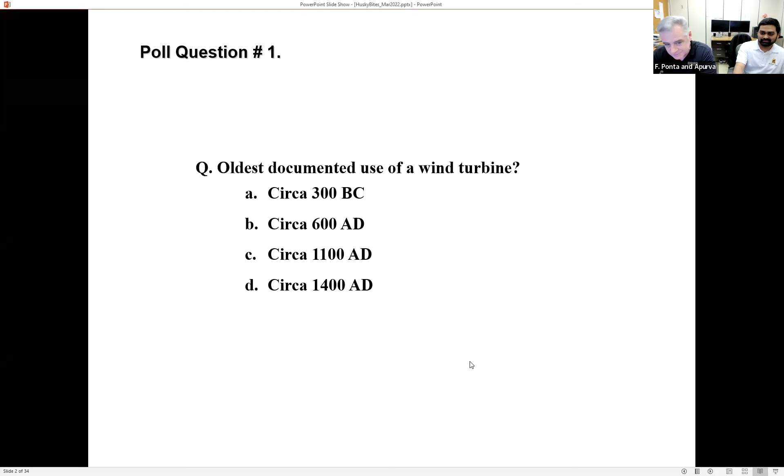As I said before, they are so useful that some of them are still in use today, very sturdy, very easy to make, build, and maintain. They are maybe the utmost example of the so-called drag-driven or drag-based machines. What do we mean by that? The primary forces that push those blades, if you want to call them, actually they are wooden planks, in order to produce power on the main shaft,

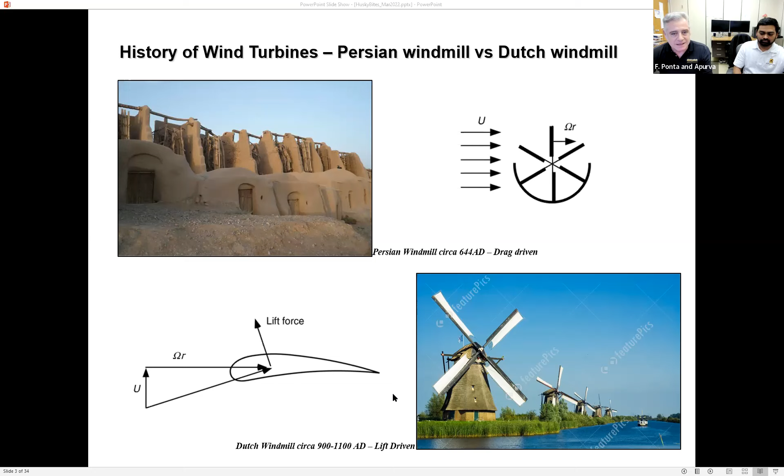Before going into that analogy, which we'll do in a couple of minutes, one thing I would like to emphasize is that this evolution over these 5 or 6 centuries was fundamental in the evolution of wind power as we know it today, because the basic physical principles of the Dutch windmill of the late Middle Ages are essentially the same physical principles on which current high-tech wind turbines operate today. They are more sophisticated and refined, but physically they are exactly the same type of horizontal axis wind turbines.

But before we go into this analogy with the evolution of sailing rigs, let's go into another poll question. Which do you think is the largest application of wind energy in terms of total accumulated terajoules along history? First option, water pumping. Second option, flour milling. Third option, sailing. And fourth, electricity generation. Again, a lot of competition. Look at that.

That's a good one. You'd have to make a lot of assumptions about all these things. Pay attention to what we said here: total accumulated terajoules. We are talking about the amount of energy, not the individual application, not how many turbines you have here and there. I'm going to go with sailing as well.

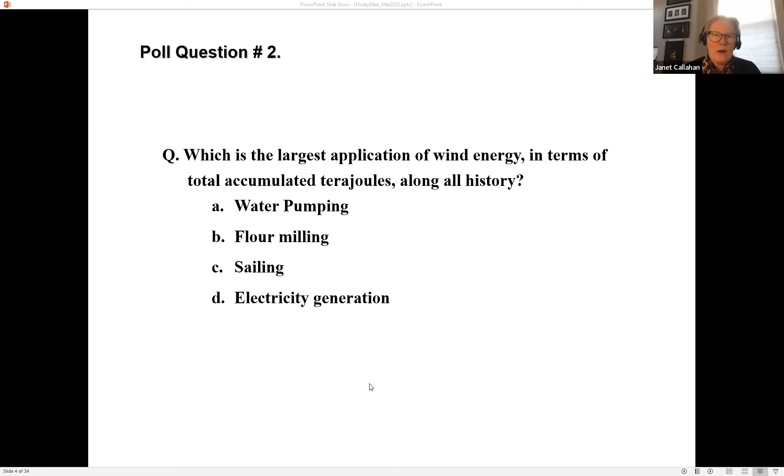I think we've got two popular answers here, water pumping and sailing. Yeah, you are the winner. Sailing is by far, and then I'm going to leave Apurva to explain this.

So all those who chose sailing, if we consider, there's no way we can quantify the amount of energy that was used by sailors since the beginning when they started sailing, when they explored around the world. But considering all of that, the use of wind power for transportation through vessels, by far, even though we might not have concrete numbers, eclipses any other use of wind power that mankind must have involved itself in. A long history. Yeah. So yeah.

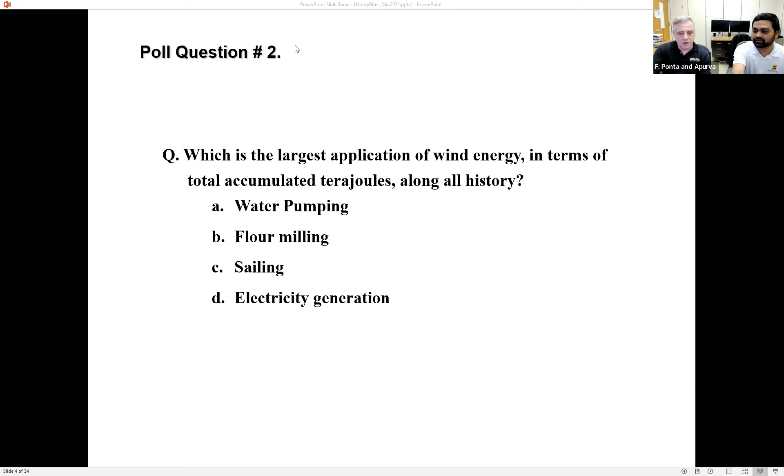So when we talk about the evolution of sailboat rigs, we need to understand a little bit about the points of sailing, as in how a sailboat moves with wind. For simplicity purposes right now, we're going to talk about three primary points of sail. The first one is very simple, the wind coming from our back, which is we are sailing downwind, and the drag forces in the downwind are the most dominant force. And that's why we can sail with the wind.

The next point of sailing is when the wind is from the side, whether it is hitting us exactly on the beam of the boat or at an angle, but primarily from behind. In such a situation, we do have a lot of lift as well as drag, but it is primarily more lift.

The third point of sailing is when we are heading much more towards the wind. We can never sail exactly into the wind, but we are still sailing upwind. In this point of sailing, the forces acting on the sail are primarily dominated by lift. And it is the lift forces which allow us to sail close to the wind, which is what allows us to sail upwind.

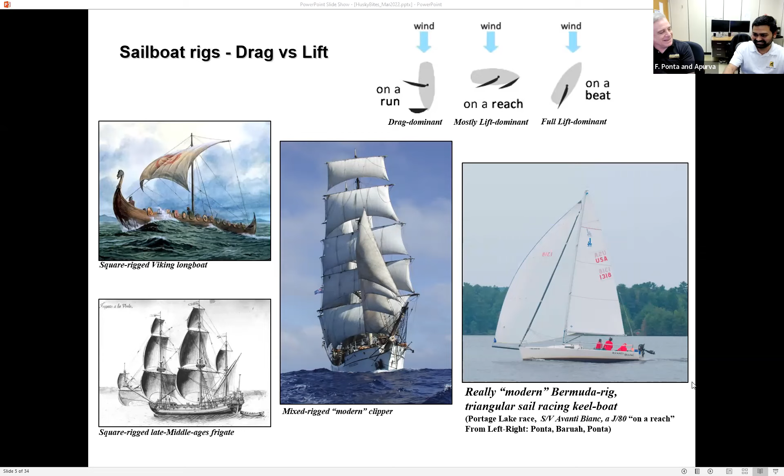So, when we say that this inherent efficiency of the lift generation process, versus the generation of drag and all these associated frictional losses, is essentially the physical underpinning of the fundamental progress in wind power. In modern times, we can trace a similar evolution in that refinement that moves us from the Dutch windmill into the high-tech, propeller-like wind turbine of today, which is the incorporation of a lot of optimization in aerodynamic surfaces and airfoil designs, etc. Material sciences too, but mostly aerodynamics that are used in aeronautics.

So without entering too much into details, because obviously we have these time limitations, here we can see a schematic view of this classical, 3-bladed propeller type wind turbine of any size, and we can see how we can decompose the typical blade into segments. Later, we're going to return a bit to this notion of the blade segments. Each segment is some sort of slice that you can cut, and it's going to have some sort of airfoil profile, because it may vary along the blade in different shapes, which are more suitable to operate in regions closer to the hub or closer to the tip, etc.

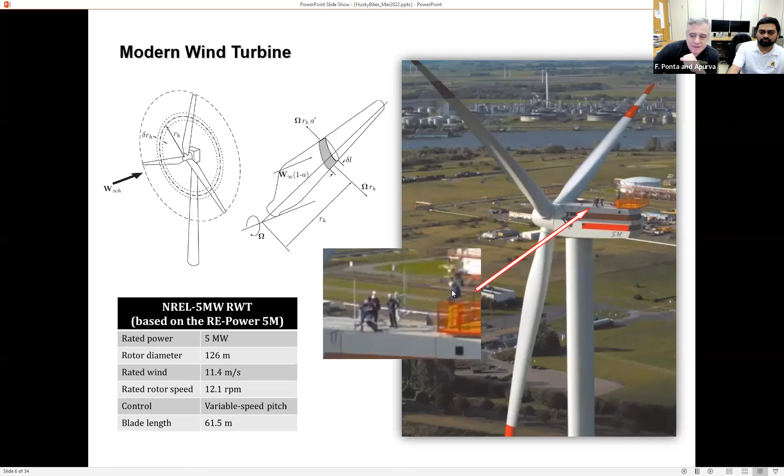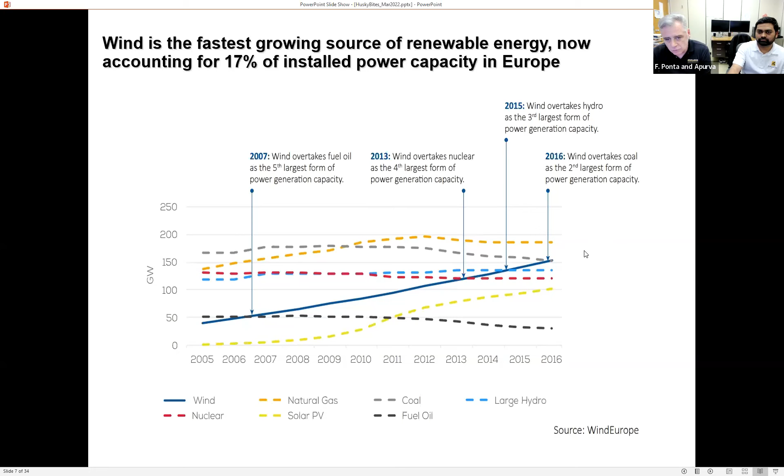We're talking about the big economic group, which together with China and the United States is one of the biggest in the world. Now in 2022, probably, wind is already by far the most important source of installed capacity in Europe. And this is not just a question of history, it's what we can expect in the future.

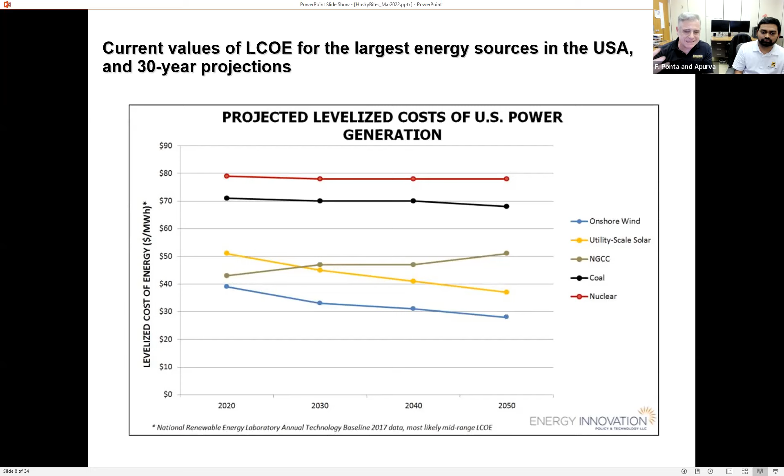And it's not only today, it's the projections for the future: that economic advantage is likely to increase systematically for the next 30 years, while the rest of the sources are likely to remain constant, especially nuclear and coal, and natural gas actually is likely to go a bit up, because, well, obviously the depletion of gas reserves. So this evolution is not only just the technology, it's also the increase in the size of the typical machine, essentially the state of the art wind turbine of today.

That leads to our third question, which is, in your opinion, the approximate diameter of the largest operational, not planned, operational wind turbine prototype of today? So can we have the poll? Could we have the poll, please?

It's good people had a chance to think about that. And I'm trying to convert to like feet in my head and to the size of a stadium. Yeah. I'm just gonna guess bigger here. Yeah. 220.

This could have been a tricky question that we put there, because there are two key words there. One is operational and the other prototype. And the choices range from 80 meters to 220 meters. Yes, exactly. So later, Apurva is going to talk a bit more about how to translate that into more practical distances. The actual answer is 220.

Why? Because we talk about the largest operational prototype, a prototype that is running and tested. Most of the people answered 160, which is not so wrong when you talk about the largest operational commercial turbine of today. Because if we talk about size, actually between 120 and 160 they form the core of the turbines that are installed today commercially. But the state of the art, the cutting edge in terms of size of turbines, is 220. And there is a reason for this continuous scaling, if you can go to the next transparency.

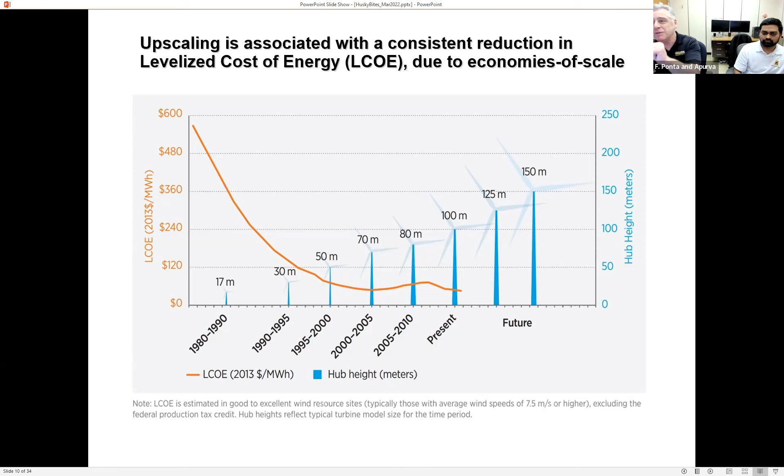But the upscaling is a fundamental factor. When is it going to end? We don't know. Actually, we can have some speculations. We can discuss later if people are interested in the question section. Where are we at today?

So anyone who got 220 meters, rejoice, you were correct. 220 meters is the largest currently installed diameter of a turbine. This is the GE machine. They're currently testing it in Rotterdam, in the Netherlands. This is a machine that is also going to be installed in a project closer to home in the United States. It's just off the coast of Massachusetts.

People have heard of Martha's Vineyard. That is where they're going to install this, and that is an offshore wind farm as well. Now, to put things in perspective, the turbine blades of this are 107 meters long, and that is just a little less than an American football field, end to end. That is how long one blade is. Another way to think of this is it would take Usain Bolt, the fastest human on Earth, 10 seconds to run from one end to the other.

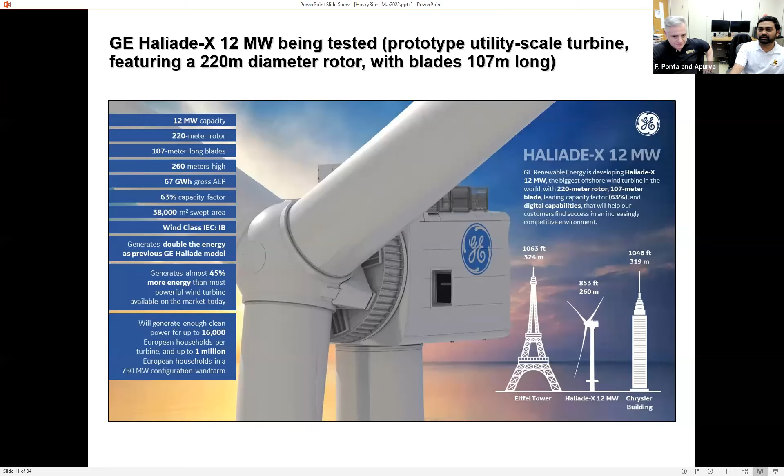Yeah. So that has been one of the big focuses in the area, to improve and make individual turbines better through all these years. But moving forward, we need to think beyond just the scope of one turbine as well. And the real thing here is that even though you can invest time, effort and resources, which is very valuable, in improving the performance of the individual turbine in many aspects, technological, economical, resilience, you name it, wind turbines don't operate alone.

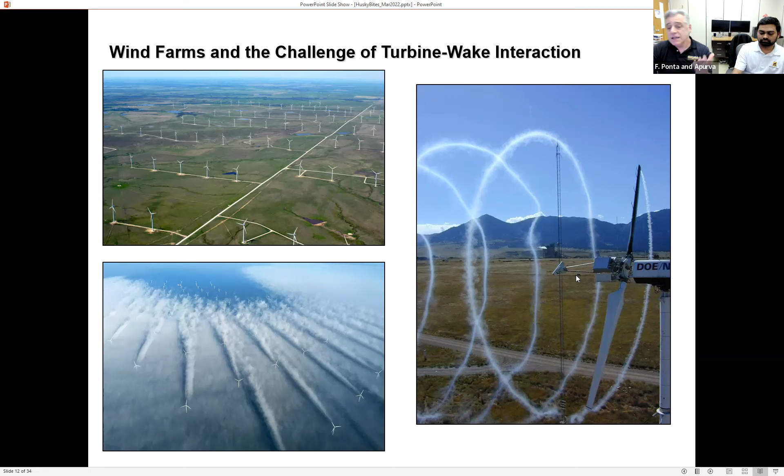Well, this is not just a theoretical curiosity. In terms of aeronautics, for example, the action of these tip vortices is likely to produce substantial changes in the aerodynamic efficiency of the wings, to the point that, if you look at modern airliners, even new versions of old airplanes like the Airbus 320, etc.

Now they have these winglets added in order to mitigate the influence of those tip vortices. Those winglets, simple pieces of plastic connected to those tips, can introduce savings in fuel consumption all the way from 5 to 10%, which is a lot.

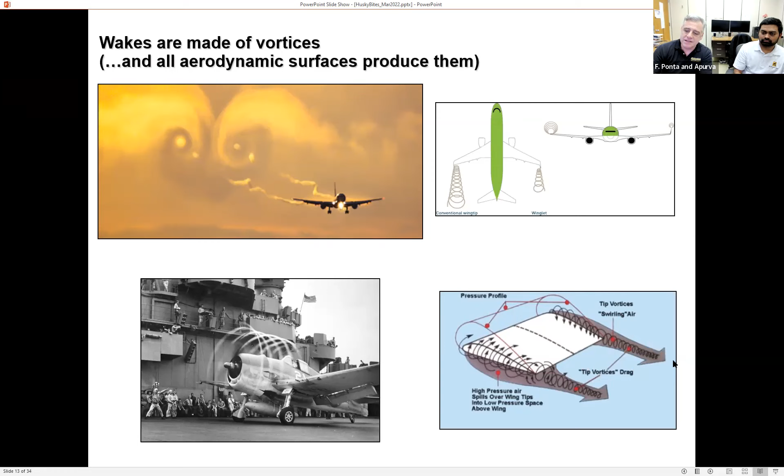Well, without entering too much into details, the tip vortices are the most important or the most visible because they essentially emanate from the point where the distortions on the velocity field are the most intense, because the aerodynamic surface is ending. You have a solid on one side, you have air on the other, and then the difference in pressure induces this swirling motion that then is advected downstream in what is called a trailing vortex.

So now we are going to enter into a very quick and difficult to compress part of what we are doing now, which is essentially the basic essence of the model that we have developed and are employing today in our work with Sandia Labs. We call it the Gaussian core.

Yeah, I just want to say we already have 24 open questions. So, I know you have 20 more slides left, if there's any chunks you can skip or go high speed through. We are going to go high speed because we have groups of 5 or 3 or 4 that are compressed together in like a mini movie.

Tick, tick, tick. Okay. Anyway, to make it brief, the mathematics is really complex, and obviously, as Jan said, we don't have the time to go into the details. We are happy to respond to questions later if people are interested. But essentially, these vortex lattice techniques try to simulate the velocity patterns on the wake by analyzing and tracking the evolution of those filaments.

Let's imagine that this is a segment of the blade, or one of those slices that we mentioned before. It is going to have associated vortex filaments that are shed at the ends, the trailing filaments, each one of them inducing this rotating velocity pattern around, and then some other set of filaments which are called shed filaments that are emanating roughly parallel to that blade element.

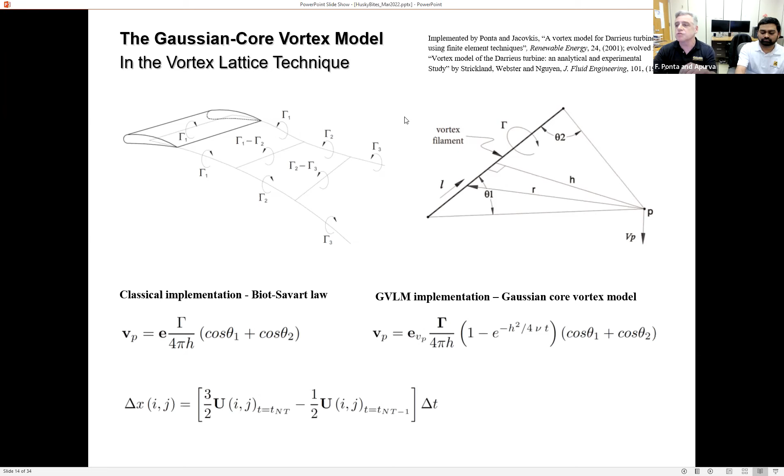Let's say that we grab this blade element and we consider another element which is adjacent here and another one over here, and then another one in the other direction, and we can cover the whole span of the blade. So when we put this structure with the others in the surroundings, what we're going to have is a network, and here is how it looks in this kind of schematic representation of the wake, or the vortex wake if you want, of this wind turbine.

So here we can see this network is what we just mentioned before. The most powerful vortices are emanating from the tip and from the root, but there are others emanated in the middle every time that you have some sort of change of the conditions, the shape of the airfoil, the tapering of the blade, etc. So here we can see a close view of that.

This network forms a lattice. Each blade emanates one of these lattices, and here, only for clarity, we are seeing only the lattice of one of the blades. But when we put the three of them together, we can create a long representation of the wake, as we have seen here.

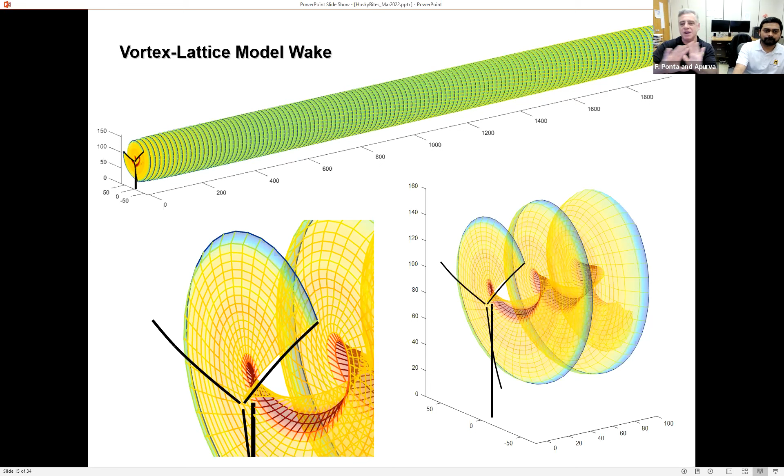The plot that we are seeing here indicates a very typical, I would say, simple wake that we can create when we put the model of this turbine in an imaginary wind tunnel with a constant stream, etc., and it creates this cylindrical shape.

But when the turbine is exposed to real wind conditions, like, for example, these ones that Sandia has measured in their facility at Lubbock, Texas, we are going to have differences in velocity in the background wind, which is going to be slower at the bottom and faster at the top. And that creates distortions in the pattern of vortices that are emanating.

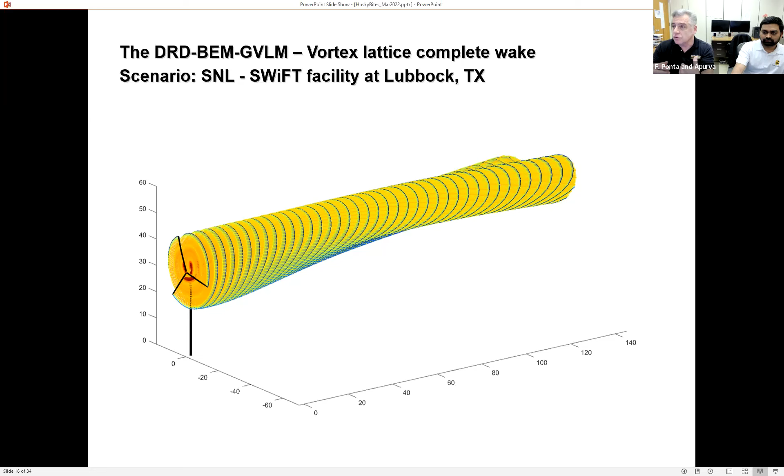And then the vortices start to act up by influencing each other, creating very complex patterns in which those spaghettis, if you want, those vortical filaments get together, and then start to create very difficult to predict trajectories and shapes for those wakes.

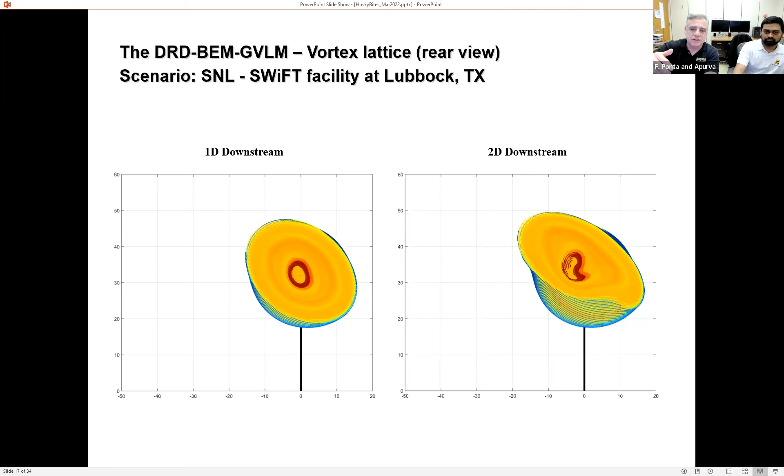So here we could see, it's like grabbing that same wake that we have seen before, cutting progressive slices downstream, at 1 diameter distant downstream from the turbine, 2 diameters. As we could see here, the vortex stretches, splits, and in the end, we're going to have these concentrations of vorticity, which group together many filaments, which join forces to produce very powerful vortex structures.

As you could see, it's difficult to connect the actual shape of the wake when it is downstream with the shape of the object that generated it, which is just a disk. So this, again, is not a theoretical curiosity, because in conditions where we have these concentrations of vorticity, they are likely to produce velocity patterns that essentially are going to hit the next turbine that is downstream.

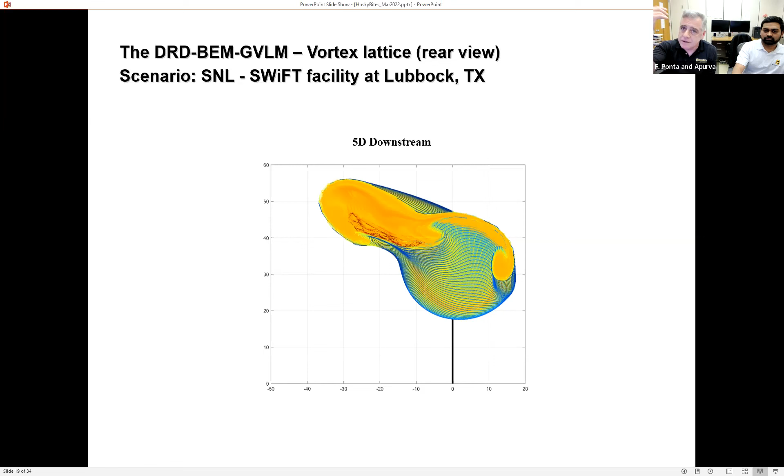So what we can measure is how the wind is behaving, or what the flow of air is behind a turbine. And how that is done is in the SWiFT facility that Sandia has. It consists of 3 turbines, and on one turbine in the front, at the back of the turbine on the nacelle, they've mounted a laser.

And what that laser does is it shoots a beam behind, and at specific distances behind the turbine, over here we see that it's done this at 5 distances, it's able to measure the velocity at one point. Now, when it follows a pattern, which is called a rosette over here, once it measures the velocity at each of those points, with those data, we can get a map of the velocity at that particular spherical surface.

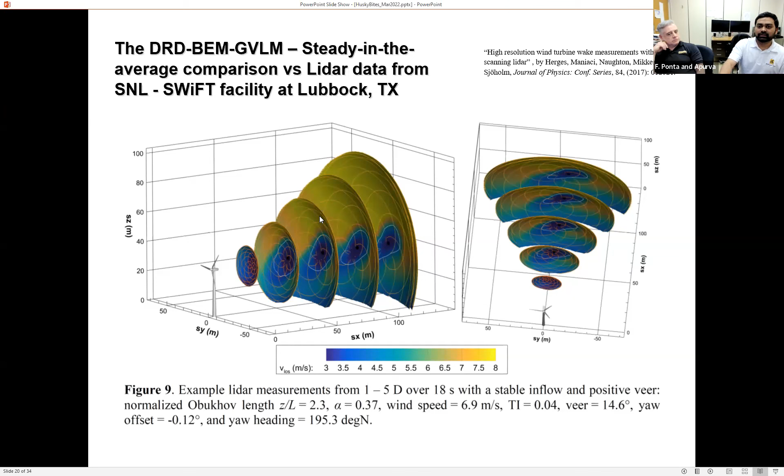A much clearer picture is in this slide, where we're comparing the velocities at 2 specific distances behind the first turbine. One is 2 diameter lengths behind, and the second one on the right is 5 diameters. And if you see, we do see a very, very good agreement with what the real wind turbine measurements are.

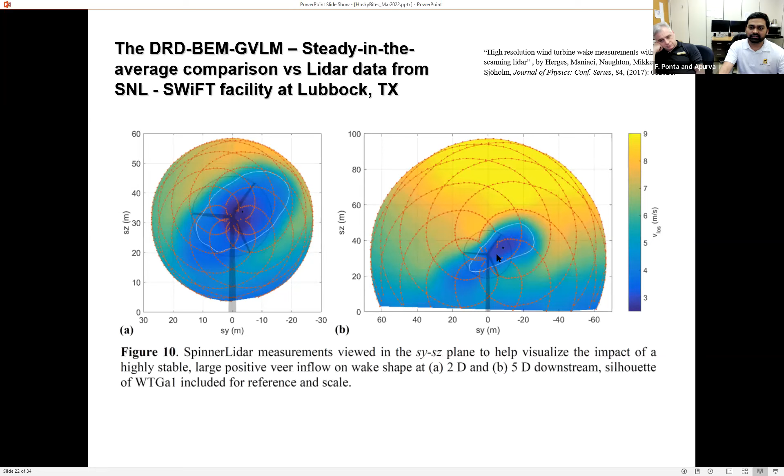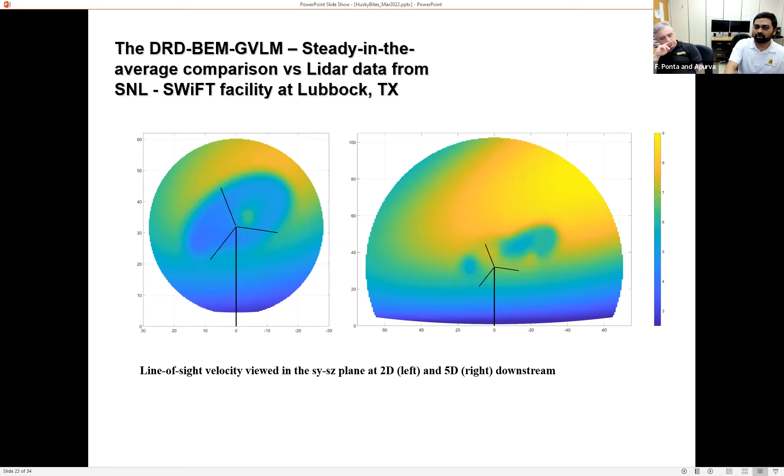Now, what we are really interested in is these dark blue patches. Those are the patches where the velocity of the flow is very low compared to the entire background flow. That is crucial in the design, the layout and the analysis of a wind farm. So the better we can predict and understand these regions, the better we can model farms and have a better production of energy.

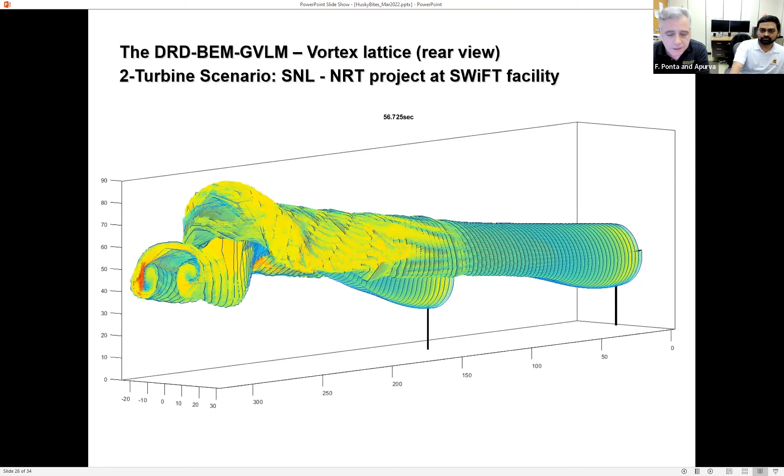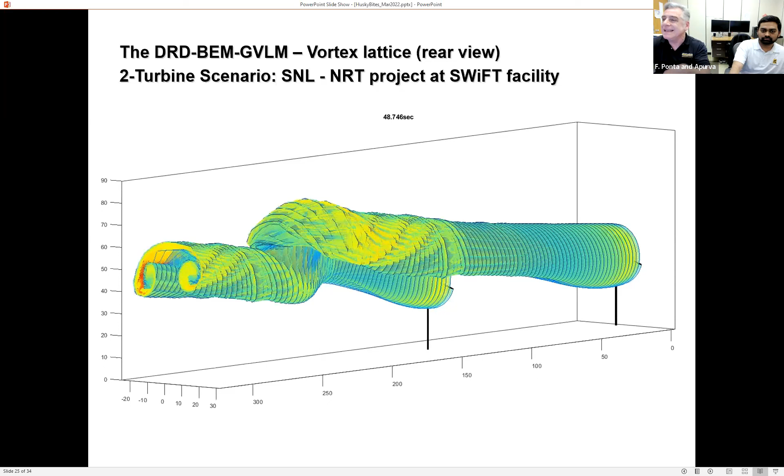So as you could see here, the first turbine generates a wake that progressively intermingles with the second one to create a third transition in those vortical structures. So now Apurva is going to, can you show the previous? As you could see, what we see here is essentially the trajectory of the wake that the second turbine would have produced if it had been operating alone.

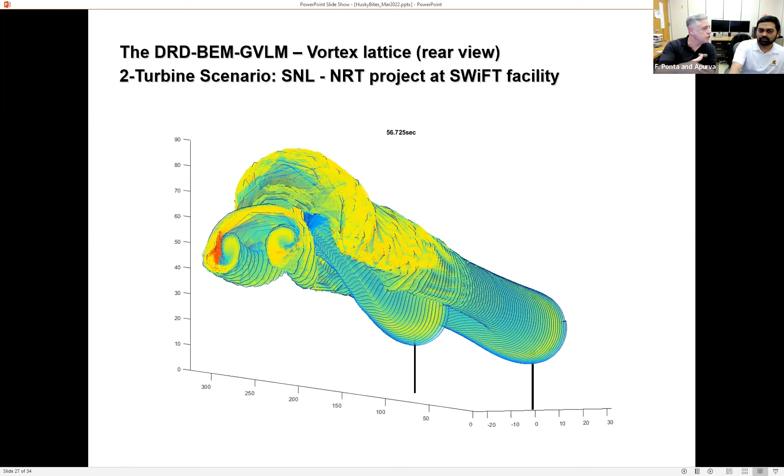And suddenly, because of the influence of the wake that emanates from the frontal turbine, the trajectory of those vortices gets altered. And essentially they start to merge together in such a manner that they create a different structure, which is completely new versus what you can expect by analyzing only one turbine. These things are not trivial, as we mentioned before.

For example, here we selected just 2 variables to show the influence, trying to analyze this impact of low velocity spots, or essentially fluctuating velocity patterns. In red, what we could see here is, sorry, the tip deflection that you can see along time for the first turbine. And in black is the one associated with the second turbine.

When we start the simulation, imagine that we can control nature and switch on the shedding of vorticity. At the beginning, both turbines operate in the same manner. They have oscillations related with the mechanical operation, flow pattern, etc., but they are very predictable. Both of them receive clean air. But as soon as the wake from the first turbine impinges on the second one, it starts to depart.

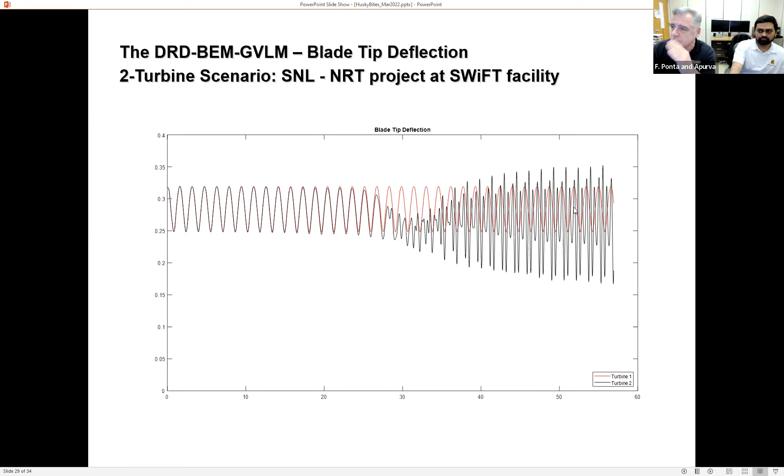Not only does it alter the average value of the displacement of the blade when it bends, but it also starts to oscillate dramatically in terms of the peaks, back and forth, of that deformation. This is not only a change in the operational conditions; it also can create substantial fatigue accumulation that, if it remains uncontrolled or unpredicted, may compromise the operational life of the turbine to the point that a wind farm intended to operate for 30 years may have to be replaced in 5, which economically is a catastrophe.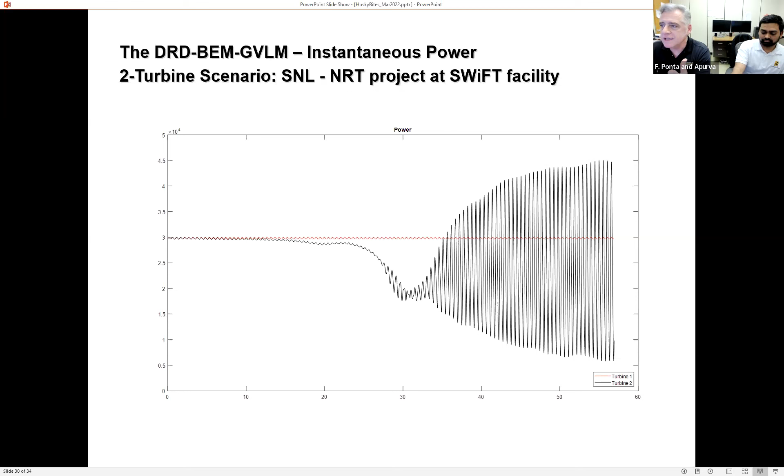So essentially what we're seeing here is that understanding the wakes is fundamental to understand very important, crucial aspects of the operation of turbines that can have significant economic and technical impacts. Just to close very briefly, there is a further step which we are entering right now in our project with Sandia. Here what we have is no more than a slice, a cross section, 2 diameters downstream of the second turbine.

As we can see, this is the process of absorption, if you want, or deflection of the second wake into the first one. Here we are seeing the second wake with and without the first one. And if we can put the first one, essentially after the second wake got inside the first, the first gets reabsorbed inside the second.

So essentially what we have here is what in the jargon of vortex dynamics is called vortex merging or vortex coalescence. That means that vortices that were small merge together to create a bigger vortex structure. The bad news about that is that bigger vortex structures can survive longer, and they can travel farther downstream to impact, for example, the third or the fourth or the fifth row of turbines in the farm.

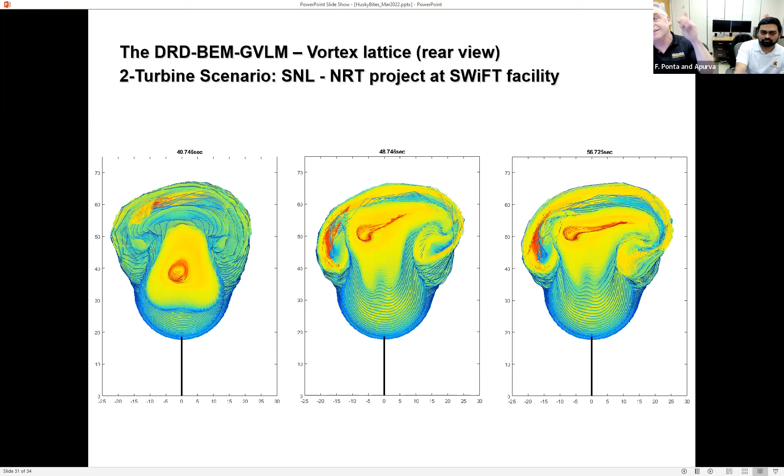The good news is that if you design a proper control strategy, what you could do is use the wake of the upwind turbine to manipulate the wake of the downwind turbine in such a manner as to suck it to the side, essentially deflect it in such a manner that you can force it, or at least herd it if you want, to avoid turbines which are behind, improving their operation in terms of fatigue or even just the power production.

All that requires good quality modeling of the wind farm, which is extremely expensive, something that you cannot conduct in a wind tunnel, because the difference in size between a small farm that you can put in the test section of a wind tunnel is orders of magnitude from the kilometers that a wind farm is going to occupy in reality.

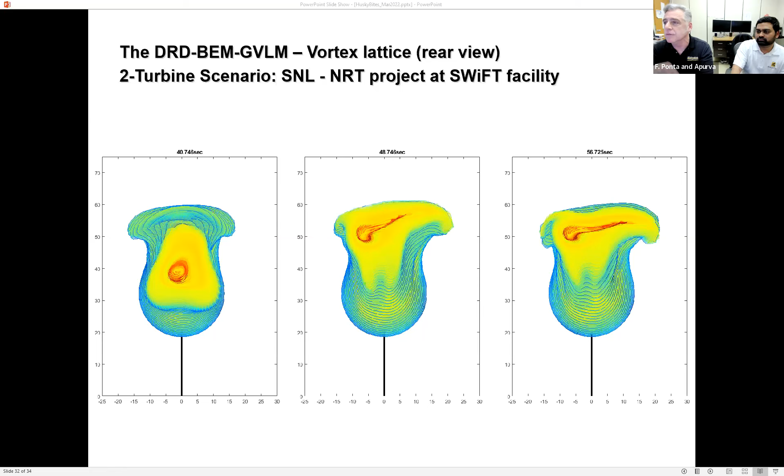And this is essentially the next stage of our collaboration with Sandia, with the controls people, to use these models as a platform to test their control strategies to manipulate those wakes in the way that we want them to operate.